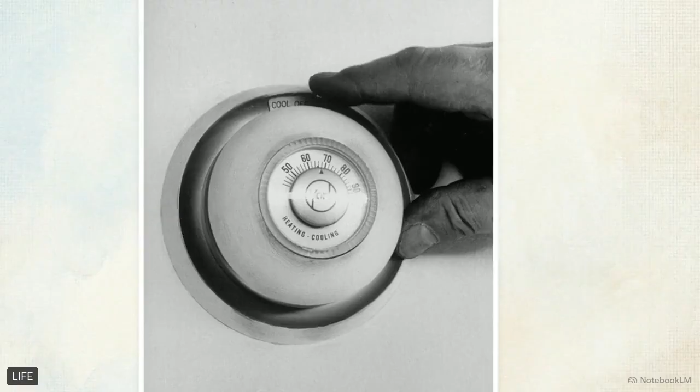Picture staying in a hotel with a friend next door. You like your room freezing cold, but they want theirs toasty warm. You walk over to the wall, turn the dial to cool, and they turn theirs to heat. Within minutes, both of you are perfectly comfortable in your own spaces.

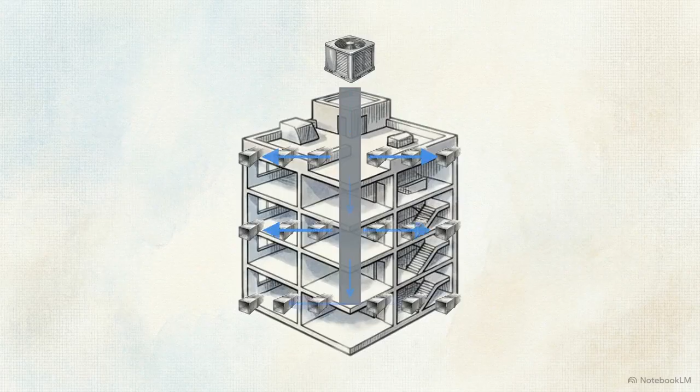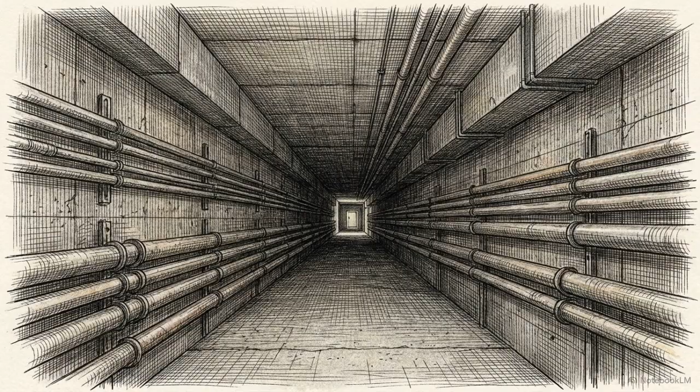Usually, keeping a large building comfortable requires massive metal ducts hidden above the ceilings, pushing air outward from a giant central fan. But in a typical hotel room, there simply isn't enough physical space for those heavy metal tunnels. Your air isn't being pushed from a distant mechanical room. Instead, the climate control happens right inside your room, using a locally based tool built for individual room control, the Fan Coil Unit.

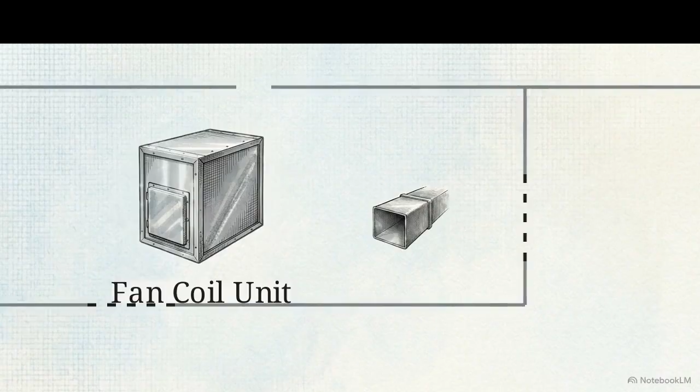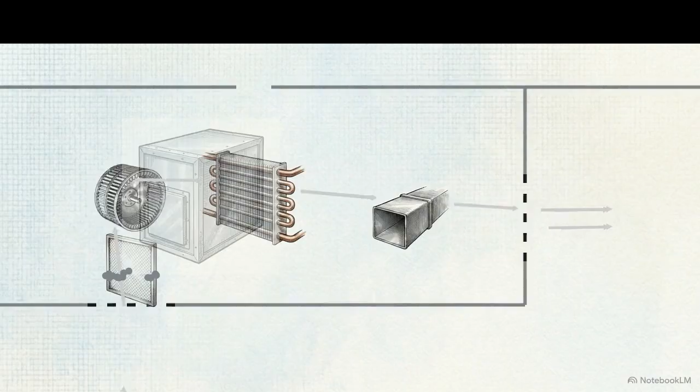To find the Fan Coil Unit, you usually just have to look up, right above the room's entryway ceiling. Inside that hidden metal box, a small fan spins. It pulls the existing air directly from your room and pushes it through a mesh filter to remove dust. Next, that cleaned air passes over a metal coil. This coil is filled with water pumped in from the building's central heating or cooling plant.

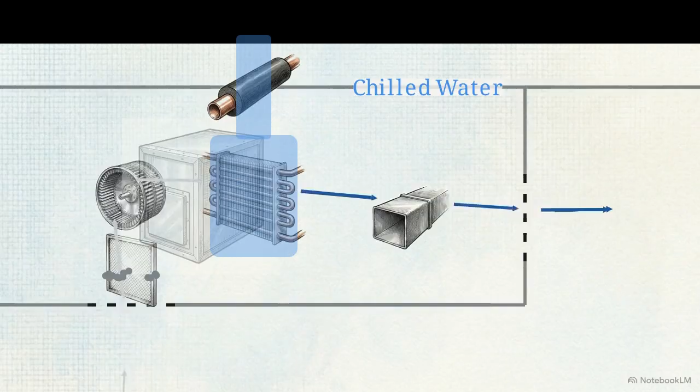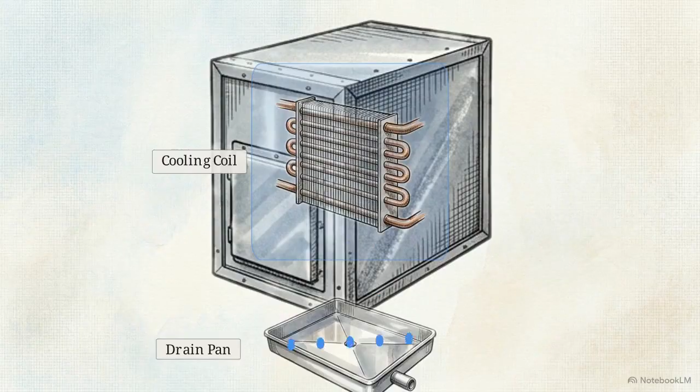If you asked for cold air, chilled water runs through the pipes, cooling the air down as it blows past. Cooling warm air causes moisture to drop out of it, just like water droplets forming on the outside of a cold glass of lemonade. A drain pan sits underneath to catch that water and pipe it away before it can cause a leak. By putting both the fan and the coil right above your head, the building can treat the air for each room individually, right where you are standing.

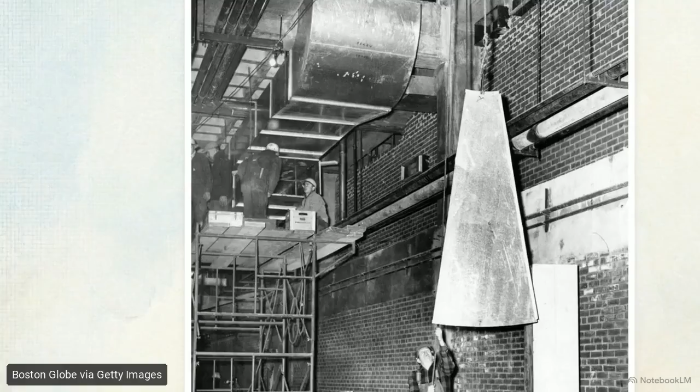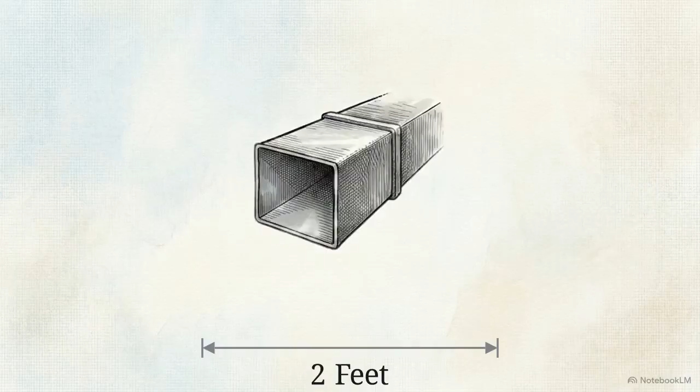The reason architects and engineers rely on fan coil units comes down to a simple reality. Water is a much more efficient way to move heat around than air. If a building relies entirely on air to carry heating and cooling, it needs massive, bulky tunnels to get that air to every floor. But water is so effective at holding energy that a 2-foot-wide metal duct can be replaced by a sleek 2-inch water pipe. These small pipes weave through the building structure, carrying hot or cold water from the central equipment in the basement to your room's local unit.

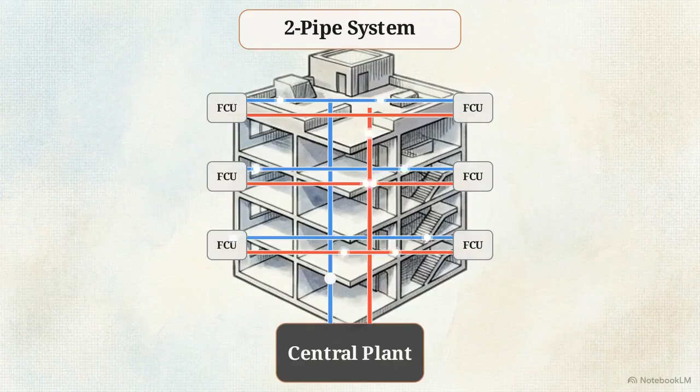Replacing giant air ducts with tiny water pipes saves a lot of vertical space. This makes these units the primary choice for renovating older buildings with low ceilings, or any project where every inch of ceiling height matters. But how these pipes are laid out changes how much control you have. The most budget-friendly setup is a 2-pipe system. One pipe brings water in, and one pipe takes it back. In this setup, those 2 pipes can only carry hot water or cold water for the whole building at once. On a fall day, the side of the building in the sun might need cooling, while the shaded side is freezing. A 2-pipe system means the building has to choose one mode for everyone.

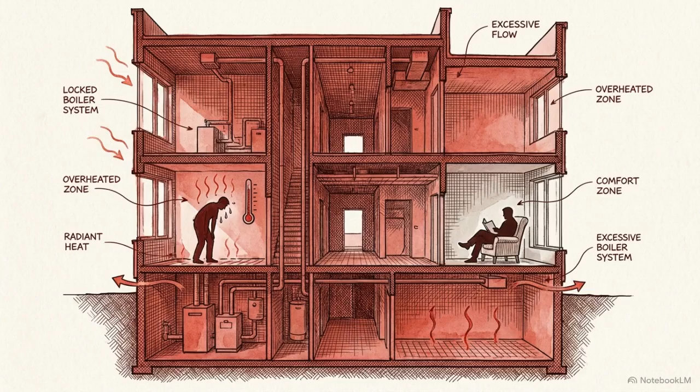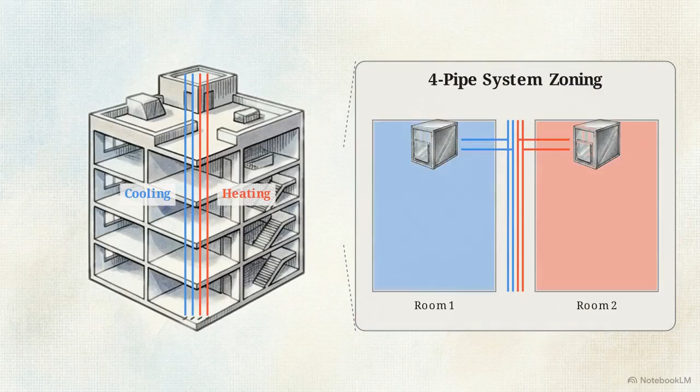Higher-end buildings use a 4-pipe system instead. This runs 2 separate loops, one for hot and one for cold. With 4 pipes, adjacent rooms can heat and cool at the exact same time. A 2-pipe setup is cheaper to install, but a 4-pipe setup provides the best room control.

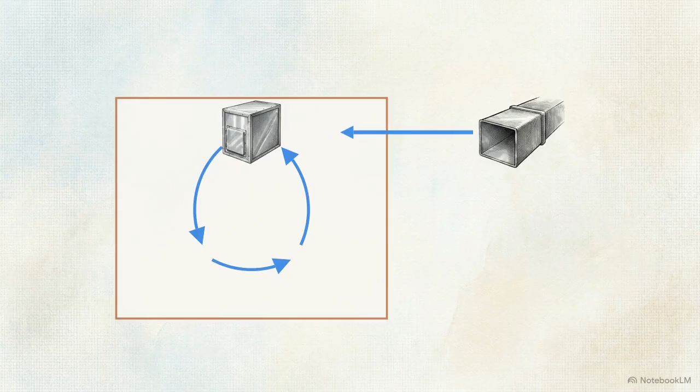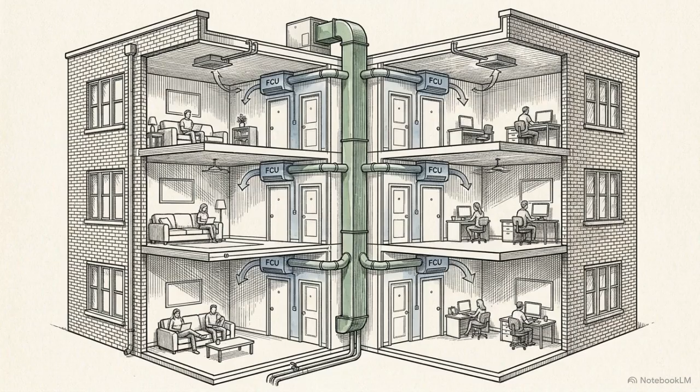While these units are great for temperature, they have one major limitation. On their own, they cannot provide you with fresh outdoor air. Because the unit just keeps recycling the air that is already in your room, a sealed space would eventually fill up with stale air. To keep the air fresh, the fan coil unit needs a partner. A separate ventilation system pipes in fresh air and manages humidity, while the local fan coil unit focuses entirely on keeping your room at the exact temperature. In places where independent room control is the priority, like apartments or dorms, this combination of fresh air and local units is the standard solution.

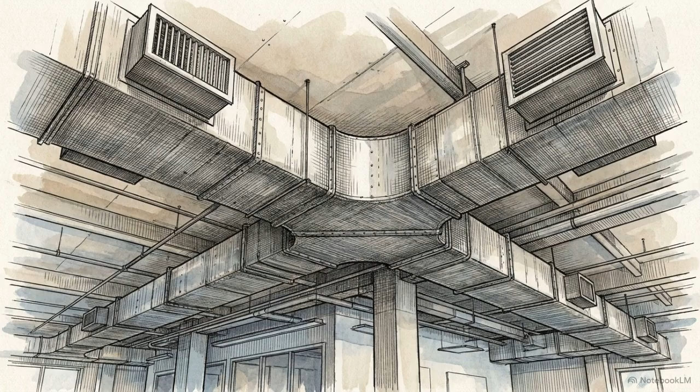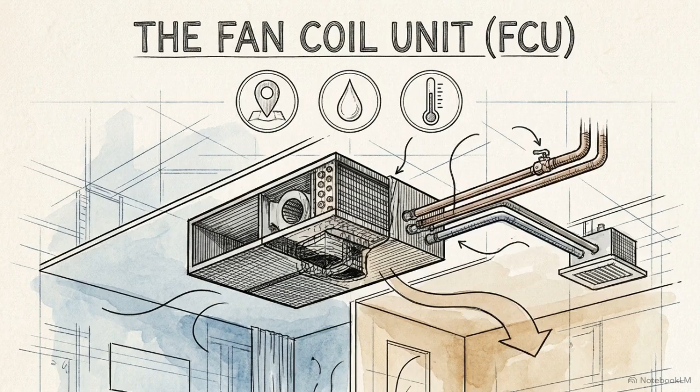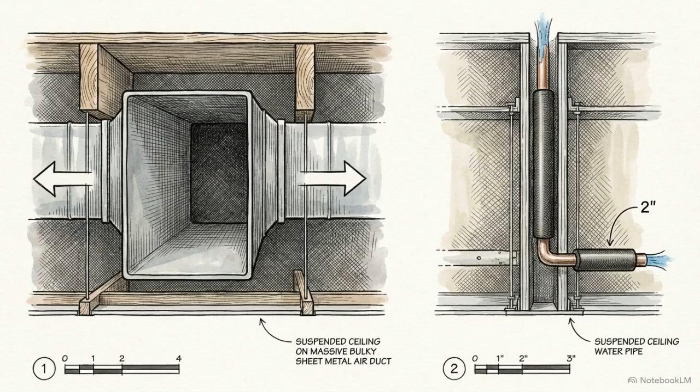This setup isn't right for everywhere. A massive, open-plan office is often better served by one big central fan that can push a huge volume of air across a wide-open floor. But when you need to give people control over their own space, the fan coil unit is the answer. It is a locally based, water-driven solution that allows for individual temperatures in every room, as long as you provide a separate source of fresh air. By moving away from massive air ducts and relying on the efficiency of water, fan coil units allow buildings to provide precise, room-by-room comfort in even the